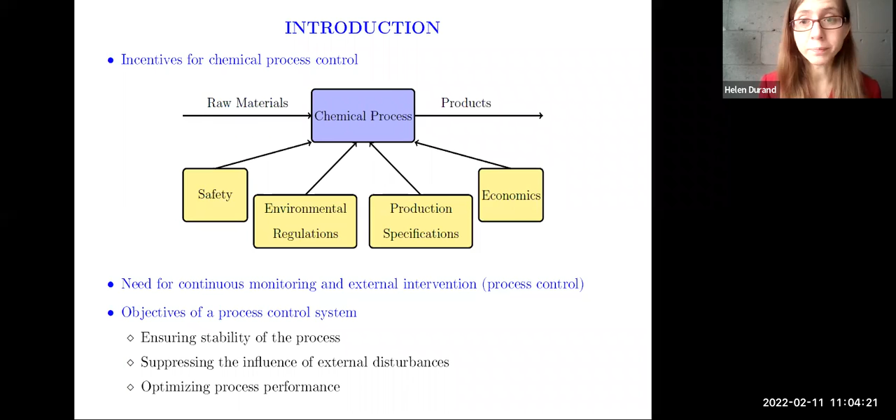We have to continuously monitor how our process is doing with respect to our objectives, and we have to do some external intervention if it's not meeting some of these. Process control gives us an automated method for that external intervention. In chemical engineering, it's very common for our process control systems to be part of feedback loops, shown here.

The basic idea of a feedback control loop is that we have an output from our process, which for chemical engineers is something like temperature, pressure, or concentration in a reactor. We measure that with a sensor, and then the measurement is compared against the set point, which is the value we want our output to take. The error between the set point and the measured value is communicated to the controller.

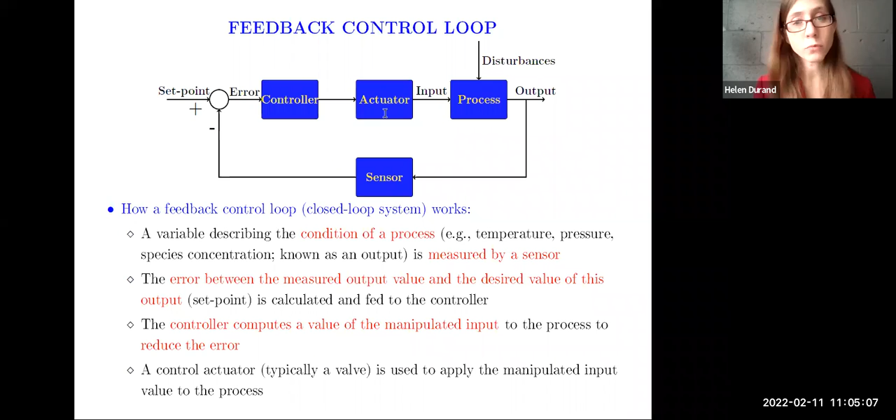The controller uses some mathematical algorithm to determine what value of input to apply to the process to try to reduce this error. Then an actuator, which for chemical processes is often a valve since we're dealing with flows of materials in pipes, will actually physically implement the input on the process.

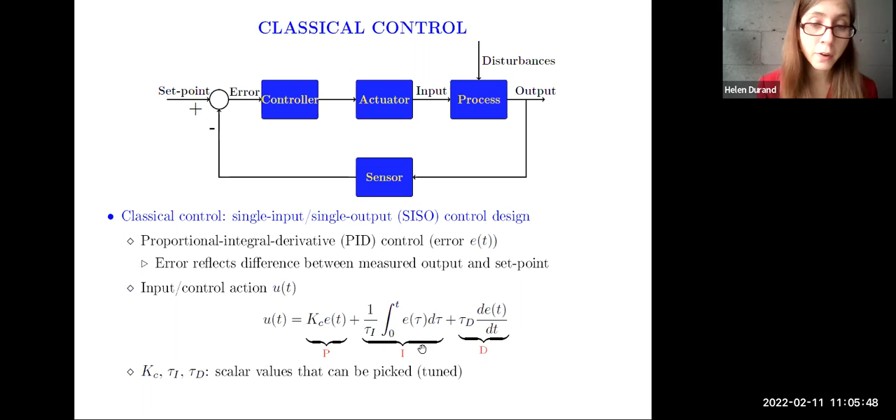The big question in control design is what mathematical algorithm the controller is running. Typically in industry, that control algorithm will be something like a proportional integral derivative, or PID, control law. It has a form where the input U for the process is equal to a function of the error e(t) between the set point and the measured value of the output. This expression includes a term proportional to the error, the integral of the error, and the time derivative of the error — hence the name PID control.

Even though this has been very successful in chemical processes and is used all over, it does have some disadvantages in some cases. For example, tuning this controller — picking the values of Kc, tau I, and tau D — typically requires a process model, and even then it can be challenging to get the best tunings. This control law is also sort of a one-size-fits-all controller; it doesn't let you adjust for different process dynamics beyond changing these tuning parameters to try to get the best response possible.

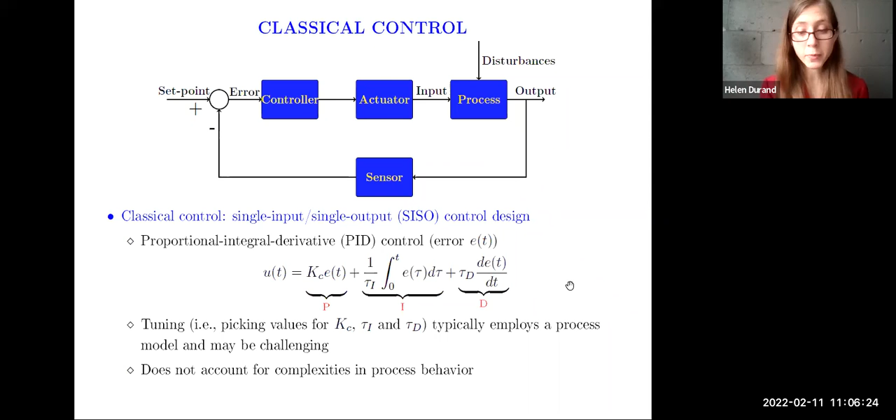So to try to move beyond this and say, okay, for some processes that's not ideal — what else could we do?

People have over the last decades been developing model-based controllers. What that means is that now the control law is not just a one-size-fits-all thing anymore. It's actually developed to be explicitly related to your specific process dynamics, supposed to help manipulate your specific dynamics at hand in a way that will give you your desired response from your process. So to do model-based control, we have to have a model.

This model comes either from first principles modeling—for chemical engineering, it would be what we call mass and energy balances, which I'll mention more about in a minute—or we identify the models from input-output process data. The model then describes our process dynamics, which is the variation of the process state variables in time due to disturbances, inputs, and interactions between variables. Controllers are then made that are based on that process model.

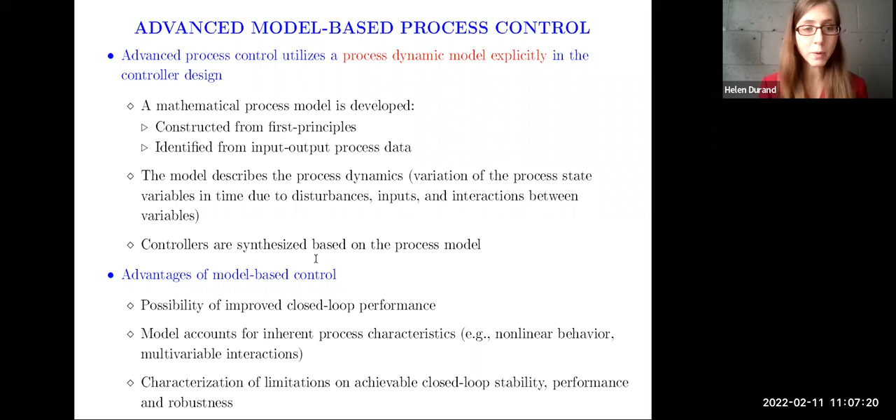In chemical engineering, a lot of times our models are nonlinear. I'm going to explain that by first describing a very typical example that we'll learn in undergrad in chemical engineering, which is called a continuous stirred tank reactor. This is one of the most basic reactor models in chemical engineering that you can have.

The idea is that you have this reactor, and there can be a heating coil with a heat rate Q being supplied to the system. There's a feed in and a feed out of this tank where reaction is occurring. The feed includes some reactant at a concentration Ca0, and there's a temperature of the inlet stream to this reactor. Then you have an outlet concentration of your reactant species A, and also a temperature.

A CSTR is considered to be perfectly mixed, has a lot of assumptions. If it's perfectly mixed, the concentration of what's leaving and the temperature of what's leaving this reactor are the same as what's inside. So that's basically what a CSTR is in our chemical engineering education.

Even this system, which has many assumptions and is very idealized, if we make a dynamic model using what are called mass and energy balances—which essentially say the mass into this has to equal the mass out plus any mass generated, and the energy in has to equal the energy out plus any energy generated—we get this system of equations showing how the temperature and the concentration of the reactant are changing in our reactor over time.

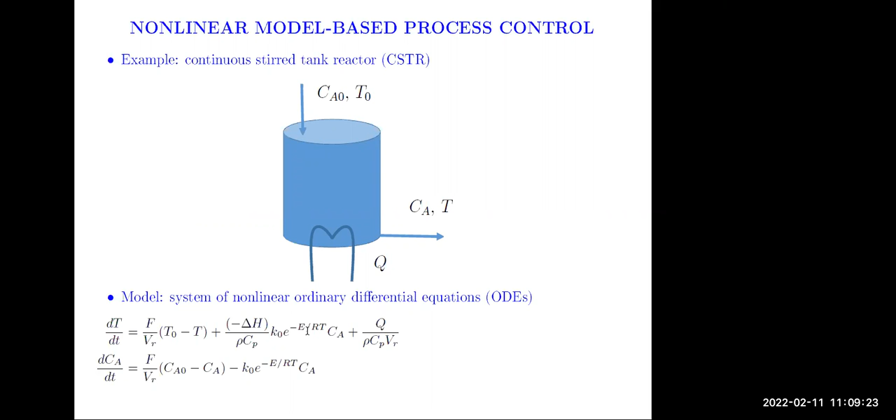But when we're designing controllers for chemical processes, we don't want it to be: okay, this controller for this process, then next process, let me redesign it from the beginning. We want to try to design general principles of controllers that can allow us to take a certain class of controllers and apply it to many different types of systems, all described by nonlinear ordinary differential equations—maybe different ones—so we have a general framework for describing their controllers.

So to do that, I'm going to introduce some notation. Here, X means the vector of the process states, which for this example would be things like temperature and concentration of the reactant in the reactor. Then we have U, which is the vector of the process inputs—something that I'm actually able to change. For example, I can change a flow rate of fluid through this heating coil, which impacts the heat rate being applied. So maybe I say the heat rate I'm adjusting, and that will be my manipulated input.

Then the disturbance here, or W, is something for the process that is changing with time, but I don't have the ability to manipulate it as I want. For example, say I'm getting feedstock from some tank, and over time the composition changes a little bit because I'm taking it from different parts of the tank, and maybe that tank wasn't fully well mixed. In that case, my concentration of reactant in the feed is changing with time, and that's like a disturbance. Now that we have that notation, this is what I'm going to be using in the remainder of this talk to signify a system of nonlinear ordinary differential equations, which can represent many process models that we use in chemical engineering.

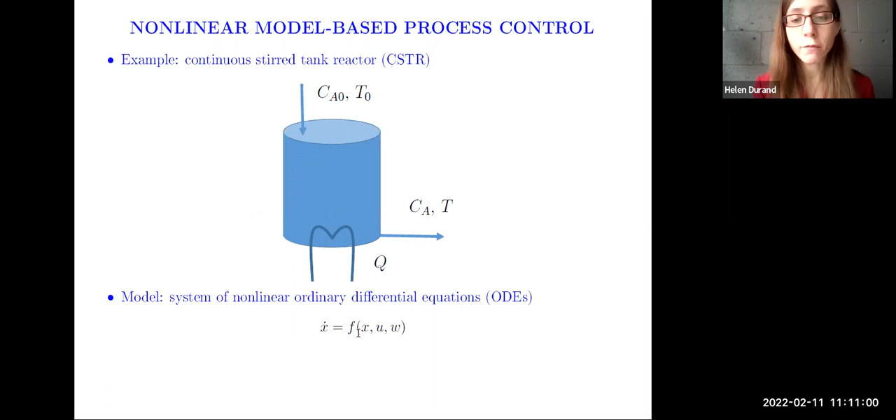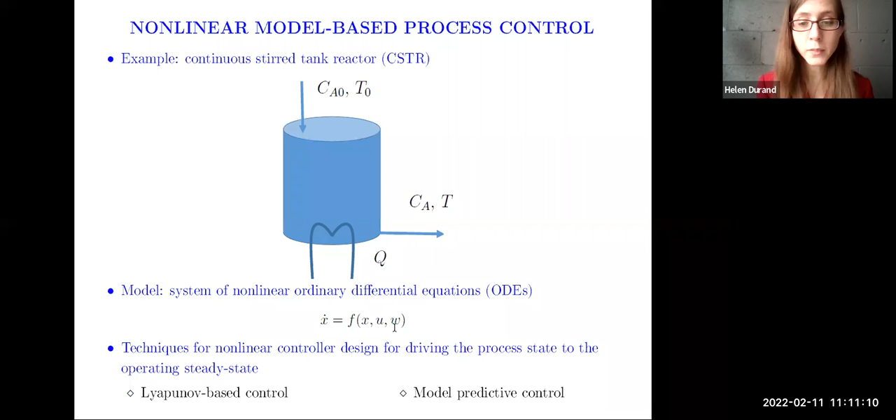So what this means is that the time derivative of the states is equal to a nonlinear vector function of our states, inputs, and disturbances. A variety of techniques have been developed for designing controllers for this class of systems, and model predictive control is the type that we work on.

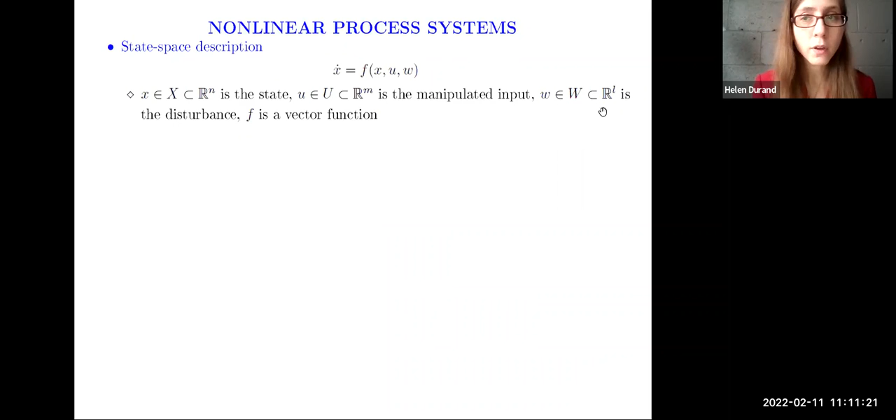I will describe model predictive control, but I have to go through a few more assumptions we're making before I do that. First, our state, our input, and our disturbance are all bounded.

Second, we assume that our process is stabilizable, in the sense that there exists some control law, an explicit function of the process state, that makes our origin or steady state asymptotically stable, meaning it will drive the state toward the steady state.

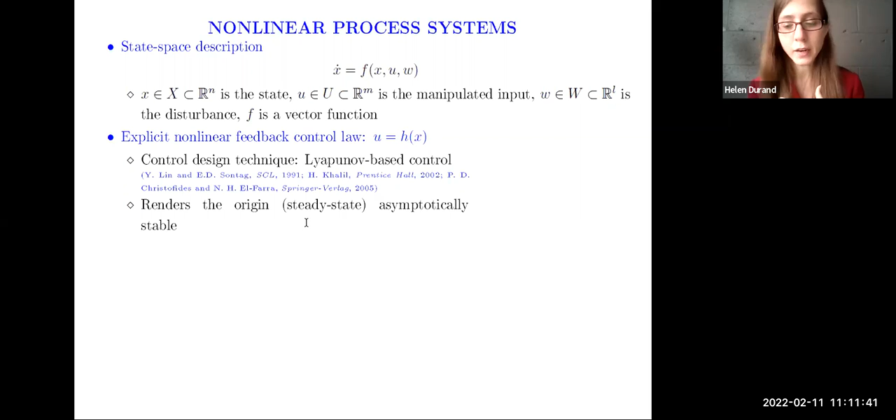In the sense that there exists a Lyapunov function V, for which the time derivative of this Lyapunov function is negative along the closed loop state trajectories under this controller h of x, for all x in the neighborhood of the origin. This is better shown in this figure.

The idea of asymptotic stability is that you approach the origin over time under your controller. If we think of this Lyapunov function like the energy of our system, it takes its zero value at our steady state or origin, and as you go progressively away from the steady state, it's increasing.

So what happens is, if I'm able to find a controller that makes this Lyapunov function decrease over time along my state trajectories, that means I must be approaching the origin under this controller, because the origin is where there is the minimum value of this Lyapunov function.

In this figure, I also denote this region omega rho in red. This is a region where the Lyapunov function is upper bounded by rho, a number. This will be important in the remainder of the talk, and I call it the stability region.

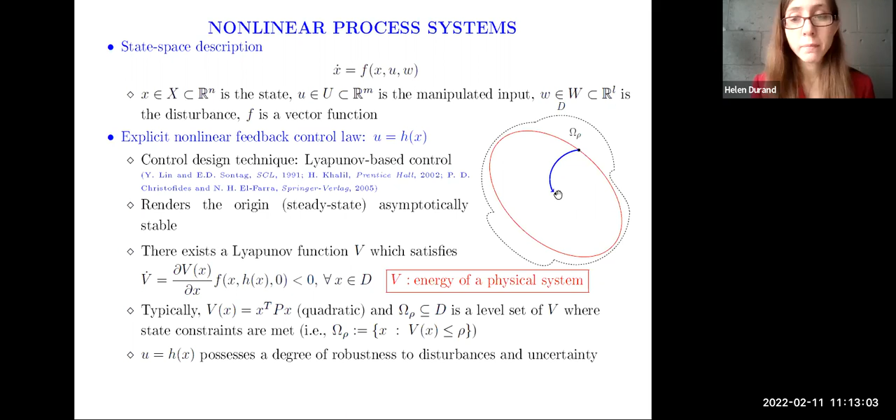Overall, our controller h of x does have a degree of robustness to disturbances and uncertainty, meaning that even when I have some plant model mismatch or disturbances and uncertainty, I'm still able to drive the process state essentially to my steady state. The drawback is that I'm not able to explicitly account for profitability using this controller, or constraints I might have for things like safety.

That's where model predictive control comes in. Model predictive control is an optimization-based control design. This means it's a controller where the control actions we're computing are actually the solution of an optimization problem.

The optimization problem typically has as its objective function, which is what we're trying to minimize, the time integral of a quadratic tracking stage cost. This would have a form like ax squared plus bu squared if you have a single state and a single input. We solve our optimization problem every delta time units.

In control, we want to continuously apply new control actions to our process to help manipulate it in the best way over time. So at every sampling time, we take a measurement of our process state, compute a new control action using this optimization problem, hold that constant for the subsequent sampling time of length delta, then resample the state, compute a new control action, and so forth.

This means that when we're computing the solution of this MPC, we compute a piecewise constant input trajectory with n pieces, where n is what we call the prediction horizon, and each piece is held constant for a period delta.

The idea is that the solution of this optimization problem is something like this dotted trajectory - a trajectory of what the input should be for my process over time, where for one time period the input is held constant, then I let it change at the next sampling time, then again at the next, and so forth, all the way to the end of the prediction horizon.

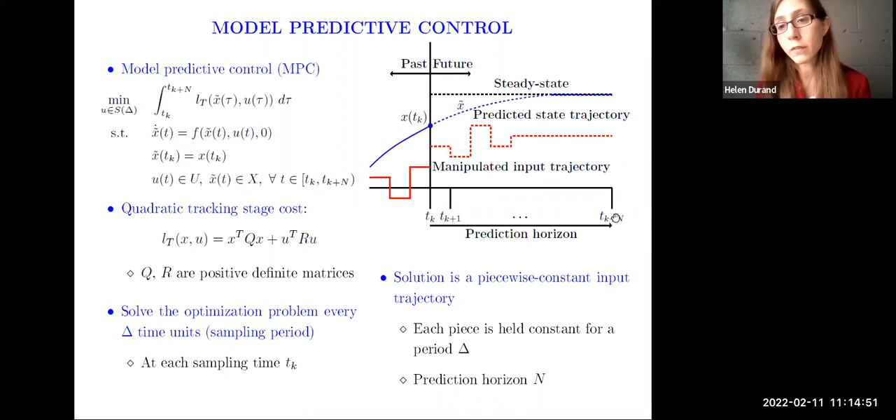When we solve this optimization problem, we're finding the values of our input that make our objective function as small as possible, given that the predictions x tilde of the state vector have to come from solving this dynamic process model, and that our input and state constraints have to be satisfied.

Typically, nonlinear programming algorithms would be used to solve an optimization problem of this type. A really important issue for MPC is the issue of feasibility of this controller - whether or not there exist any inputs that can cause all of my constraints to be met simultaneously. If not, that would be a problem, because it would mean I'm not able to meet my operating specs.

The MPC has to be designed, and the initial condition has to be chosen, such that there are control actions that can allow me to meet all of my constraints and compute a feasible control action.

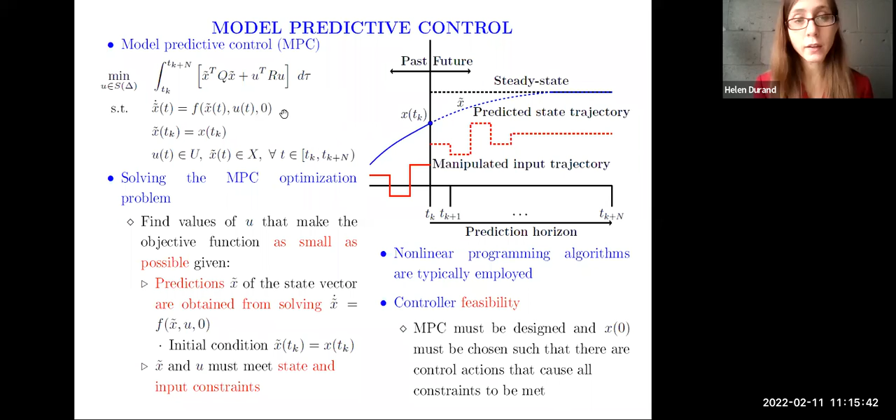So I mentioned that the solution of this optimization problem is actually a piecewise constant input trajectory that goes throughout the prediction horizon. Even though we calculate what the input should be into the future for n time periods, we actually only apply the first one to the process, because the model we're using in our MPC is not perfect. As a result of this plant-model mismatch, we want to take a measurement of our state, compute the best control action we can right now, apply it, and then discard the rest of the input trajectory we computed.

So then it might sound like, okay, why compute the entire trajectory up to n sampling times into the future if you're only going to apply the first piece? Well, the reason is very similar to when you're driving a car: you look far in front of you instead of just a foot in front of you. You don't want short-sighted behavior when choosing what's the optimal thing to do right now.

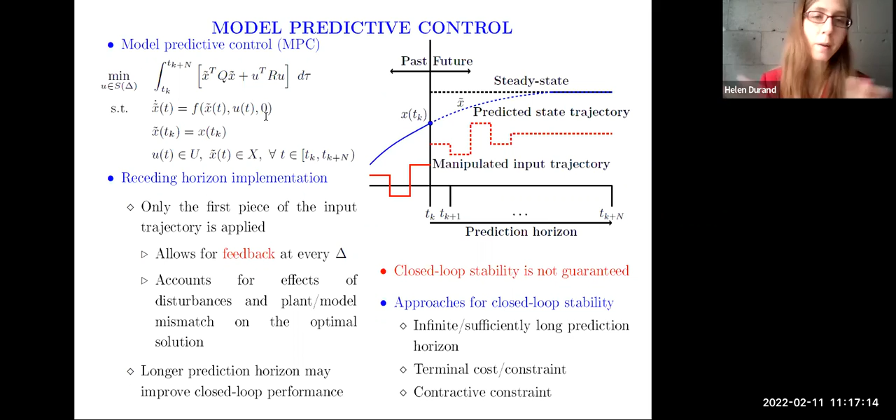So overall, the objective function of this MPC takes its smallest possible value when x tilde is 0 and u is 0, which happens at our steady state or origin. So what this means is that a well-designed MPC should be driving our closed loop state to the steady state or the origin. When it does that, that's one notion of what we call closed loop stability in control. However, even though this MPC is supposed to drive you toward the origin, without a number of different theoretical conditions or extra constraints, you actually can't guarantee that this control law is going to drive you toward the origin.

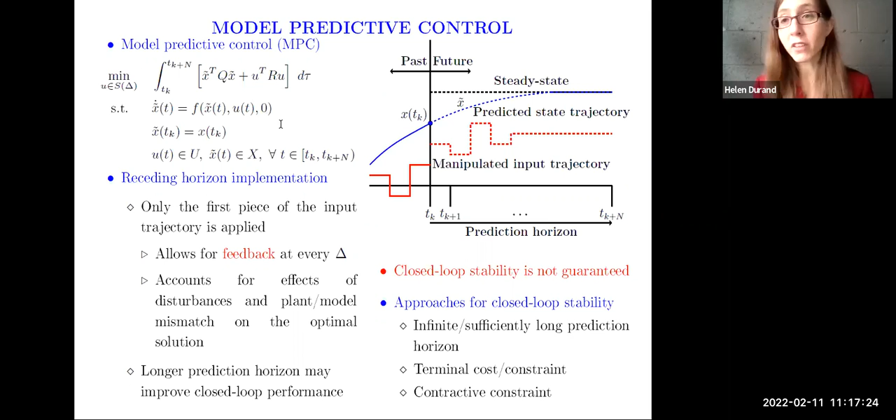But MPC has worked pretty well in practice, and we also have a lot of theories about it. So that covers what MPC is.

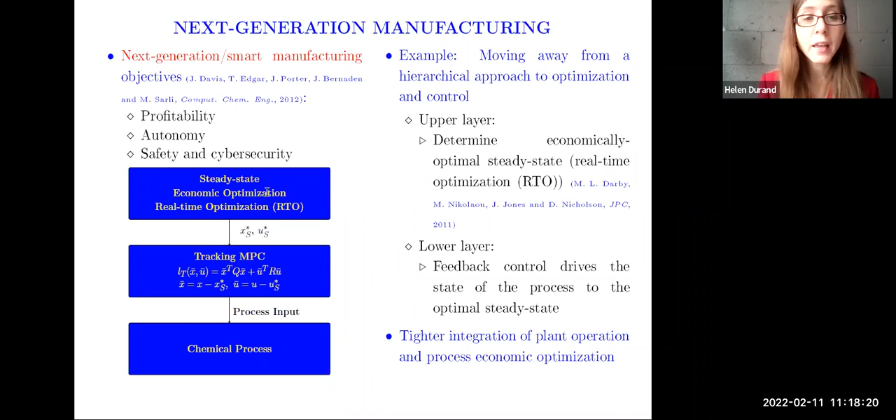Even though this is a way of integrating economic optimization and control, when we think about the goals of next generation manufacturing, like greater profitability, greater autonomy, and greater flexibility, separating economic optimization and control like this has been thought to maybe not be the best strategy. And so that led to the development, maybe around a decade ago, of economic model predictive control, or EMPC.

So what this is, is a way of trying to say, let's combine economic optimization and control into one optimization problem. Now we're going to have a model predictive controller. Instead of having this tracking stage cost that's quadratic, trying to force us to operate at the steady state, we can give it any objective function we want, including ones that represent the process economics. So now my controller is explicitly, all the time, trying to optimize my economics online.

And so what this leads to is potentially I'm not operating at steady state anymore, but that could be good in many scenarios. Say that my objective function itself, my actual representation of my economics, is actually changing with time—maybe there are changes in prices of things like my feedstocks or my utilities, like electricity. Or maybe I have time varying constraints. And so maybe I never really want to force myself to operate at any steady state—I just want to optimize my transient behavior. It's cases like that where we would expect EMPC to maybe outperform this type of steady state tracking.

But EMPC is really a generalization of MPC. So you could also say that a tracking MPC is also a form of EMPC, just with the objective function now being quadratic.

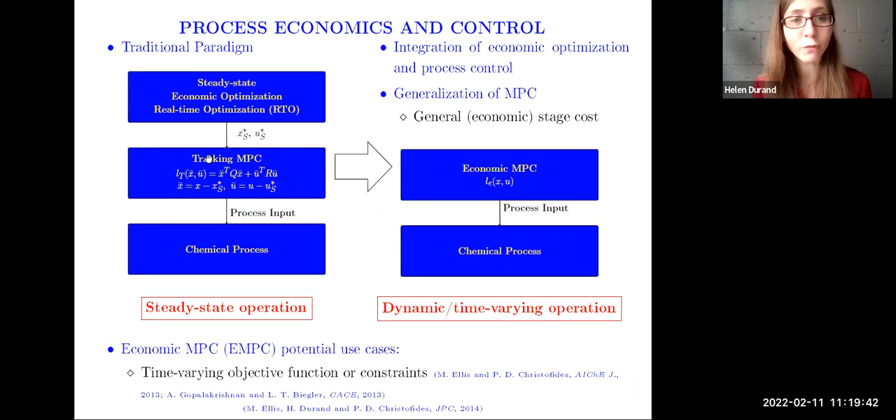EMPC, because it's really just a generalization of MPC, has the form shown here, basically the same as the MPC we already looked at: economics-based objective function, dynamic process model, feedback measurement, input and state magnitude constraints. This input rate of change constraint is not mandatory.

I added it here as a reminder that when you're trying to economically optimize your operation using a controller, you may have to add other constraints to get that controller to have behavior you like. For example, if it's optimizing economic behavior by causing very significant changes in your actuators over time, you may want to slow that down so you're not wearing out your actuators.

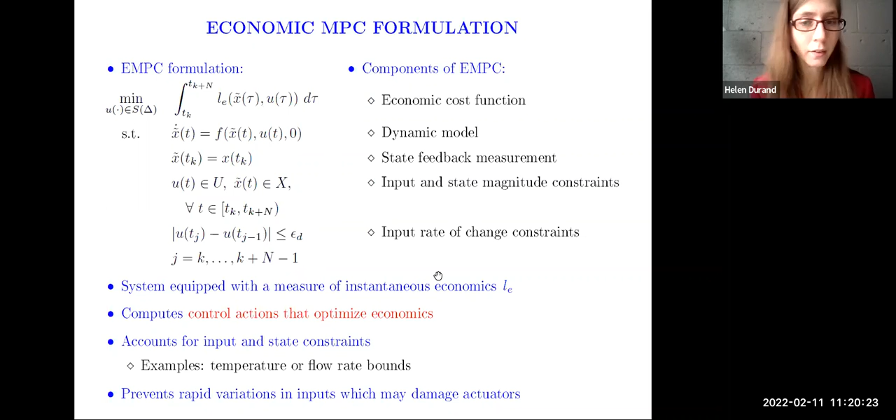Our group looks at a very special type of economic model predictive control for our cybersecurity work, because this type has really nice theoretical properties that allow us to do a lot of control theory with the cybersecurity work, helping us better understand what guarantees we can make about when things are cyber attack resilient or not. This formulation is known as Lyapunov-based economic model predictive control, or LEMPC.

This is a two-mode control design, developed in the group of Professor Christofides at UCLA. The first mode of operation requires that the predictions of the process state be maintained within this subset omega rho E of the larger stability region omega rho.

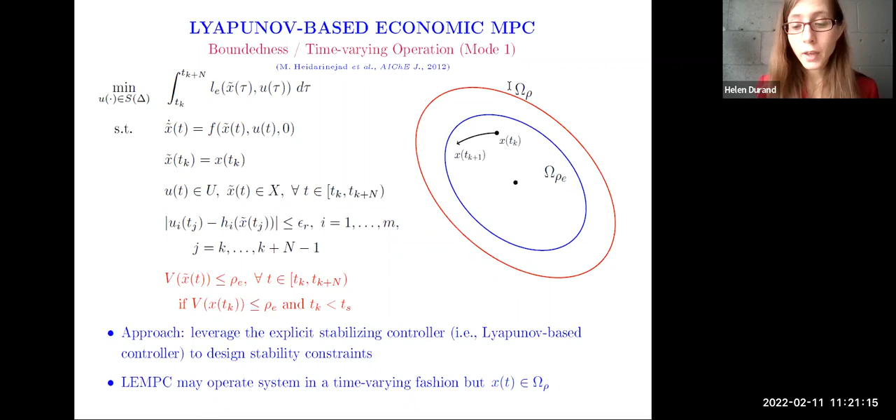The reason we do this is that it gives us a provable closed loop stability result where we can guarantee stability, in the sense of boundedness of the closed loop state within this region omega rho over time. You can think of that like a safety guarantee—for example, I guarantee that my reactor's temperature remains bounded with time. It doesn't go really, really high, causing problems like a runaway reaction.

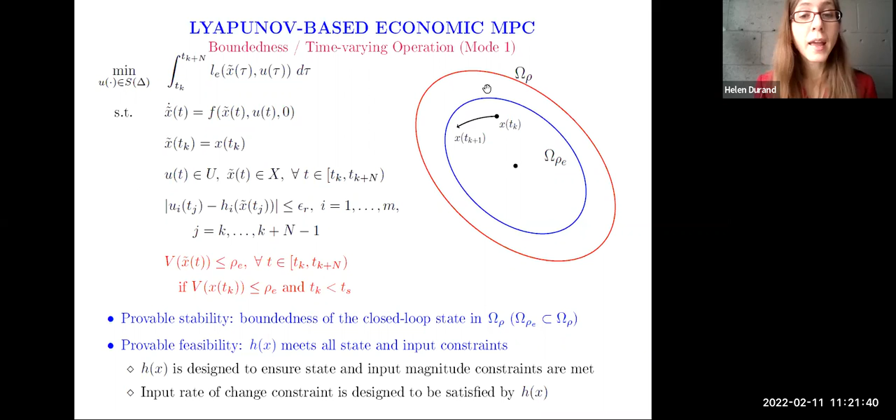We also guarantee there's always a feasible solution to this controller. We can also make some guarantees regarding the rate of change of the inputs between sampling periods. All of these results hold even in the presence of sufficiently small disturbances, due to the properties of the Lyapunov-based controller and the way the constraints are designed to respect those.

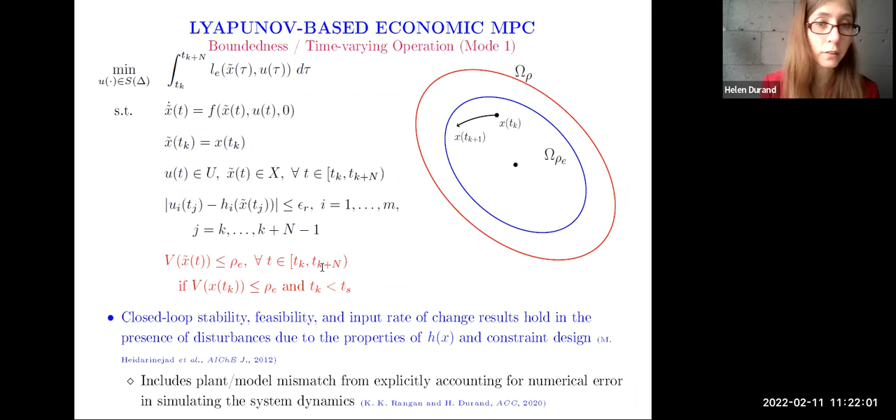The second mode of operation of LEMPC is given by this contractive constraint shown in blue, which drives the closed loop state toward the steady state over time if you keep implementing this.

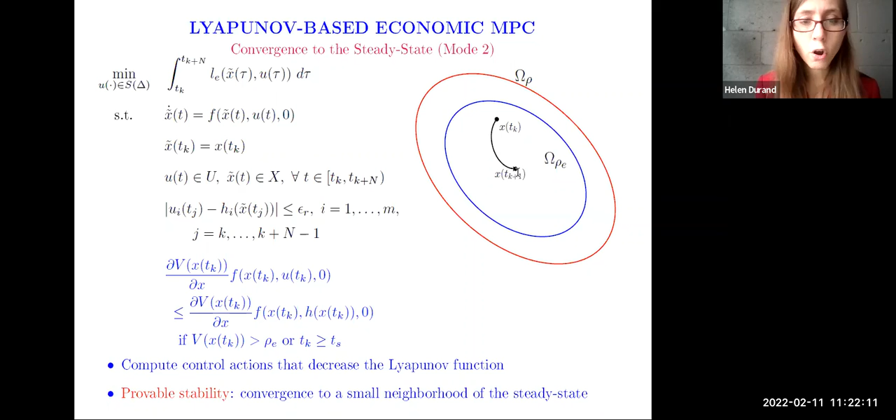So now I've covered the background on chemical process control, nonlinear model-based control, model predictive control, economic model predictive control, and Lyapunov-based economic model predictive control. I need to start talking about our work related to cybersecurity of process control systems.

As I mentioned, the motivation for this is a next generation manufacturing focus where a lot of flexibility, usage of data, and those types of things are very important. But as we try to use a lot more automation, computing systems, and data, the potential that you open yourself up to cyber attacks increases.

Cyber attacks on control systems are a particularly problematic concept because if someone has access to your control system, they can physically manipulate an actual system. For chemical engineering, that's often stuff that's very toxic, very hazardous, very problematic, potentially life-threatening to people. So cyber attacks could impact safety, but also just go after profits or production rates.

One question that should be asked is, does a cyber attacker really care about attacking a control manufacturing system? I'm going to show a few brief case studies that show yes, they do.

First, in 2009 to 2010, there was something called Stuxnet, which was a really big deal and has been in the literature about cybersecurity of control systems for a long time, because this was when it became apparent that people could use attacks on control systems to actually cause physical damage to a plant. In this case, no one was hurt, but they were able to take down centrifuges using their attacks.

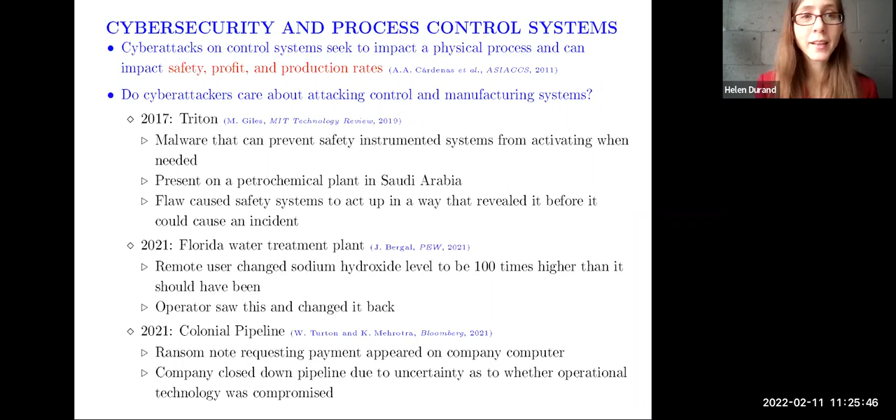In 2021, there were two big incidents. One was a Florida water treatment plant issue where a remote user went in and changed the sodium hydroxide level to be 100 times higher than it should have been, but an operator saw them remotely changing this and changed it back. The other was the Colonial Pipeline, where a company closed down a pipeline due to uncertainty as to whether operational technology was compromised, after it had become clear that someone had gotten into their system and requested money. This highlights that cyber attacks are a real issue for control systems.

Because of that, we have to start thinking about what types of attacks someone could do on a control system, and there are very many. As examples: denial of service attacks, preventing parts of your network from delivering to others; eavesdropping, where an attacker could quietly learn about the system to prepare for a more active attack later; false data injection, where they give false data to something like your sensors or actuators; time delay attacks, where they put extra delay in your measurement or control actions to try to destabilize the system; data tampering attacks, where data can be altered in storage or transmittal; and replay attacks, where correct information from prior times is sent again to make it look like everything is normal when there are really problematic things going on underneath.

The big problem is that cyber attacks on feedback controllers really destroy our whole notion of feedback control, which is that state measurements should be used to inform what inputs we apply to the process in a good way. When you somehow cut parts of the loop out in a control system, making it so the state measurements and inputs aren't related to each other anymore, this does not necessarily lead to good behavior. So our goal is to understand how and whether using control theory to look at cyber attack handling could aid in providing security with some level of flexibility for next generation manufacturing.

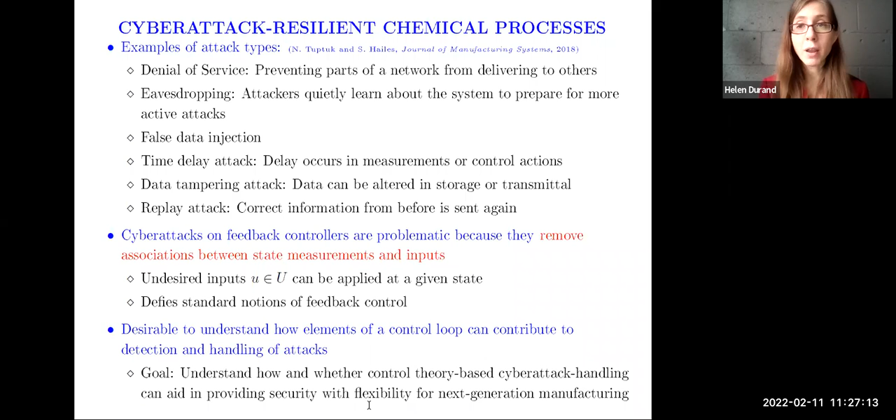There are different ways someone could try to attack a control loop. They could attack it more directly, like going straight in and recoding controllers, or putting wrong signals to the actuators instead of the ones the controller would send. Or they could do a more indirect type of attack, where they send a false measurement to the controller, which goes through the controller's processing and causes it to compute the wrong control input. Because this is complex, with many different ways people can attack processes and many different attacks they could run at once, what we've been doing is starting by looking at one type of attack occurring at a time, then building up to saying, what if multiple attacks are occurring?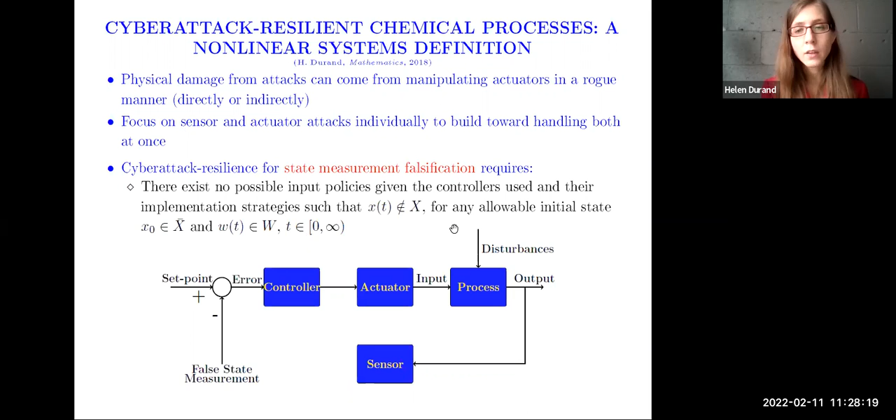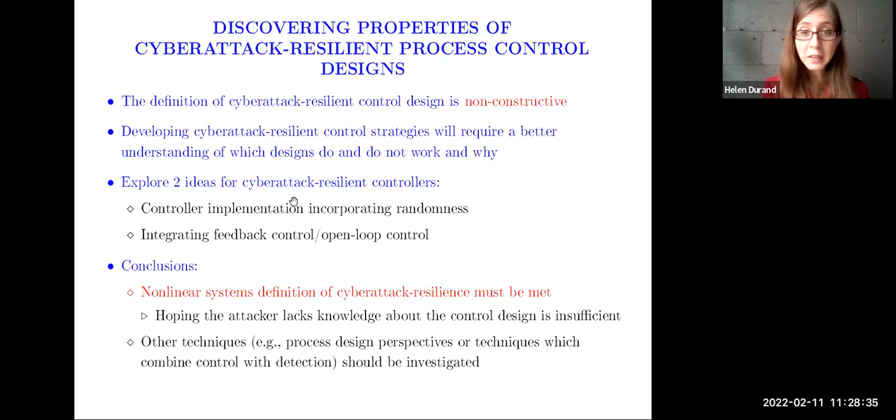I'm going to start by talking about the type of attacks we looked at first, which is attacks on the sensors. If we want our process to be resilient against any false state measurement, we'd need to say there can't be any input policies the controllers could use, with their implementation strategies, such that the state could exit a set of allowable states. But that's not really helpful for making any type of control design that achieves that. So what we did first was say, let's just try something and see what we learn. We tried something that intuitively seemed beneficial, to see whether it is: the idea was to add randomness to the control law implementation.

The specific reason we thought that might be helpful is that if we have a sensor measurement cyber attack, what the attacker is really trying to do is achieve a certain input profile from that controller by providing a state measurement that they know will go through that control law and result in a certain control action being computed. The thought process was, that's sort of like them reverse engineering this control law, because they know what this control law is, they can figure out what bad sensor measurement they need to apply to get their bad control action applied to my process.

So what if I tried to confuse that? What if I actually had multiple different control laws at any sampling time I might choose between, and then I randomly select one of them? Then maybe now it will be harder for that attacker to figure out what state measurement they should provide to get a problematic input.

Before even trying to consider something like that, we first have to ask, during normal operation, can I do that? Is this going to be destabilizing to my normal operation? We developed a strategy that was able to incorporate some level of randomness, but still maintain closed loop stability and feasibility during normal operation.

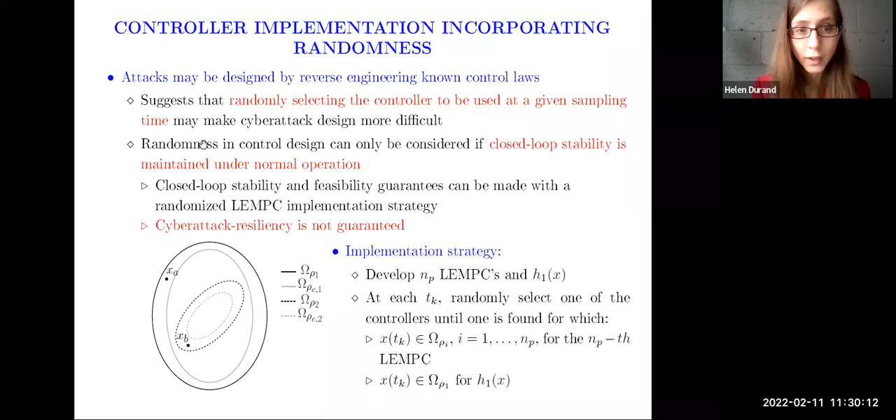The idea here was to develop a number of different LEMPCs, which I wrote here as NP of them, and also a Lyapunov-based controller. At every sampling time, randomly select one of these until we find one where our state measurement is in the stability region of that controller. This does guarantee stability and feasibility, but it does not guarantee cyber attack resiliency.

I can demonstrate this with a process example. In chemical engineering, for our control examples, we often love these CSTRs. This is that continuous stirred tank reactor I mentioned earlier, where we're having a certain type of reaction going on in the reactor. These are the dynamics of the system.

Our control objective is to regulate this process in an economically optimal time-varying fashion while maintaining closed loop stability. Our economics is going to be defined by this objective function, which we want to maximize because this is the production rate of our desired product. We're trying to maximize the production rate. We also have manipulated input constraints, which are bounds on our inputs, which are the feed rate or the feed concentration of our reactant, and then the heat rate of the reactor.

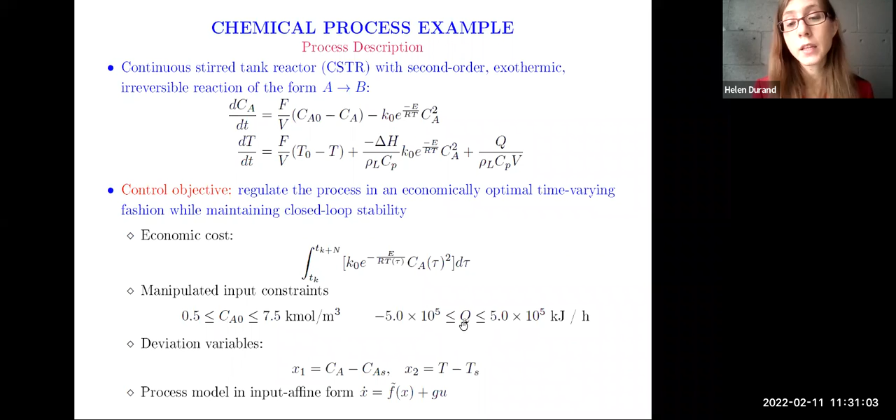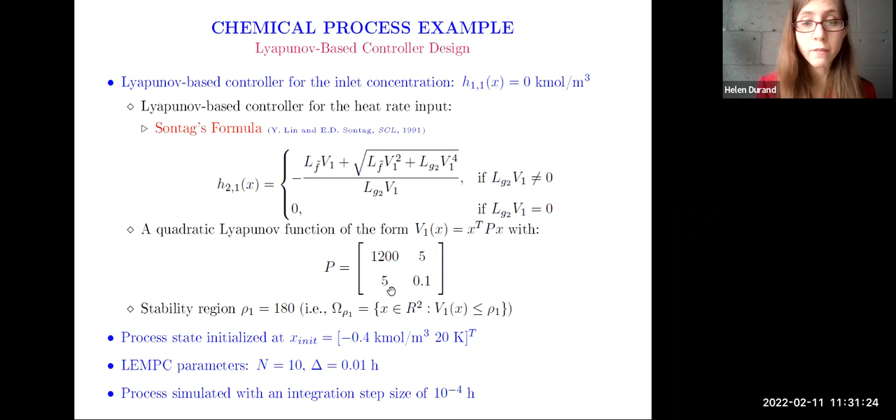We take our Lyapunov-based stability constraints, where one of them sets the input corresponding to the reactant concentration in the feed equal to a steady state value. Then we also have a case where we have a controller for the heat rate input being set via Sontag's formula, and then we have a Lyapunov function. We design our stability region. Now we're going to make 6 LEMPCs, also a Lyapunov-based controller.

So we're going to have 7 control options at every sampling time, with no attacks. In this case, we get this kind of crazy looking trajectory shown in the figure here on the right. The goal was that we never want our state to leave this largest blue region, and we can see that we achieve that. The trajectory looks a little crazy due to the random selection of the control laws at every sampling time, but it still maintains the state within the large blue region over an hour of operation.

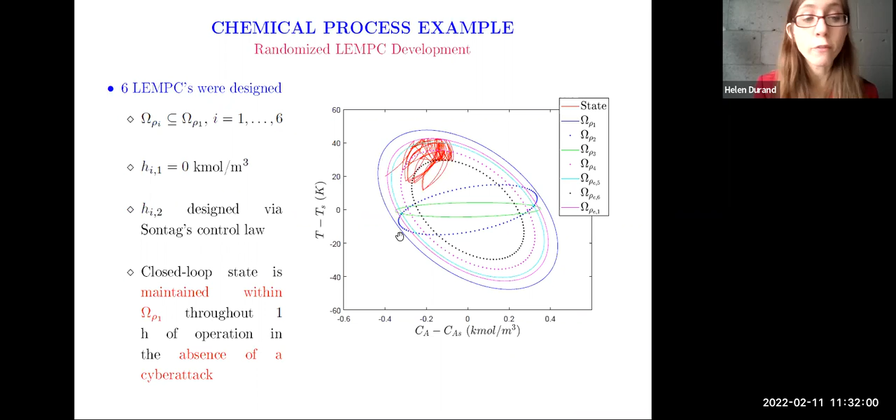So what happens when we add an attack? Let's compare the case when we have this sensor measurement cyber attack. We have a single LEMPC, and we have the randomization case. Does the randomization actually make it harder for the attacker? The answer is, not really.

Here is a bound on temperature that we set, and we say I don't want my temperature to ever go above that value. It didn't go above that value in the prior simulations when we had no attacks. But then we can watch that if we use a single LEMPC, pretty quickly, within approximately 0.01 hours, the state goes above this temperature. When we use a randomized strategy, it does depend on the seed to the random number generator, but even for cases where it waits a little longer, it doesn't wait that long—maybe after about 0.03 hours of operation, it goes above the temperature.

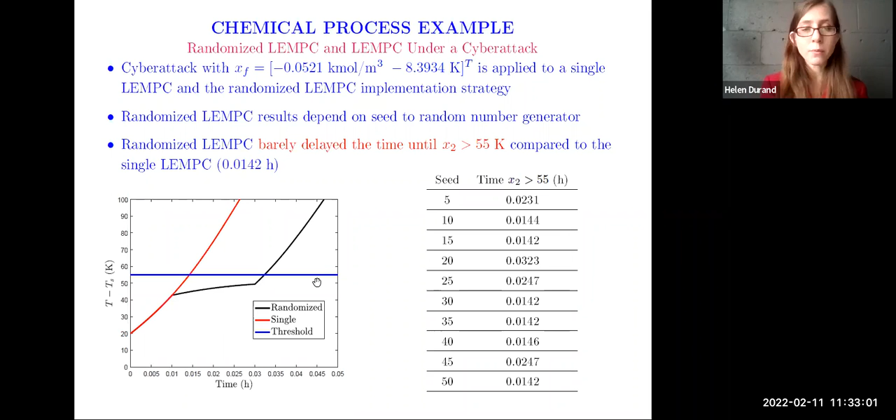So it doesn't really help that we add the randomization for this specific type of randomization policy, because what we saw is that it couldn't guarantee there were no problematic inputs that could be applied over time. So you could think of various ways of trying to modify this to do better, or maybe even trying to say, well, what if I don't want feedback at all?

That would destroy everything that we ever tried to do about control. So what's clear from this is that we need to have some new approaches.

The next thing we looked at is: what if we still have our sensors under cyber attacks, and we look at several additional strategies for controlling the process in the presence of attacks, but also add detectors? Here we design the detection policies at the same time as we design the controllers, to see if this integrated design of detection and control allows us to do any better than our prior strategy, where we just tried something that sounded intuitive.

In this case, we had an LEMPC with random modifications to try to probe for cyber attacks. This had certain conditions under which we could say an attack was occurring, but we couldn't guarantee we'd detect every attack. And if we weren't probing at the time, we couldn't guarantee we'd maintain safety. So this didn't have the best security guarantees.

We also looked at a state feedback LEMPC with an attack detection strategy based on state predictions at every sampling time. What that means is we control the process with LEMPC, but compare the state predictions versus the state measurements, checking whether they're close enough to each other.

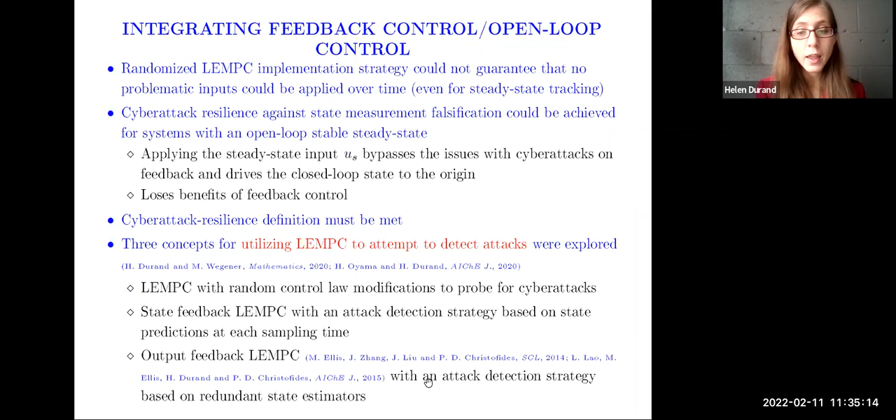Then we have this other one, the output feedback LEMPC, based on having redundant state estimators. I'll talk about this strategy more on the following slides.

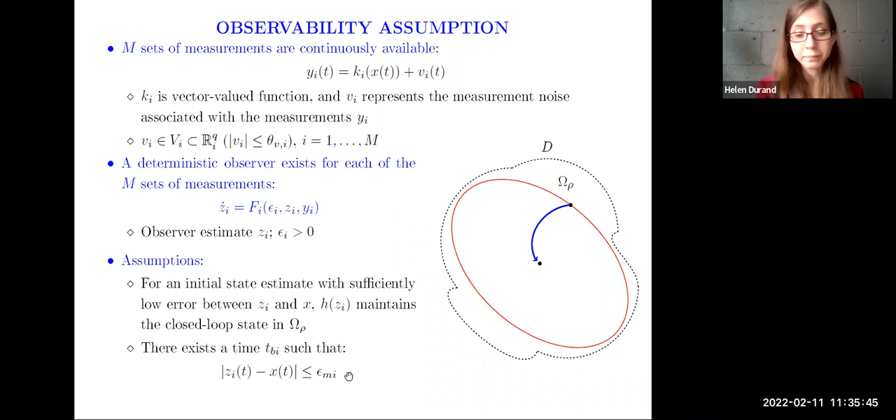This one requires that we have a number of different sets of measurements, and for each of the M sets of measurements, we develop a deterministic observer or state estimator to estimate the state of the process. We assume the estimates are within a bound, in a norm sense, of the actual state after a certain amount of time, so the estimates become pretty accurate.

With that, we modify our LEMPC design to replace the state measurements with state estimates. Just as if we had state measurements that were wrong, if we have state estimates that are wrong, we could compromise closed loop stability and our state could leave the safe operating region.

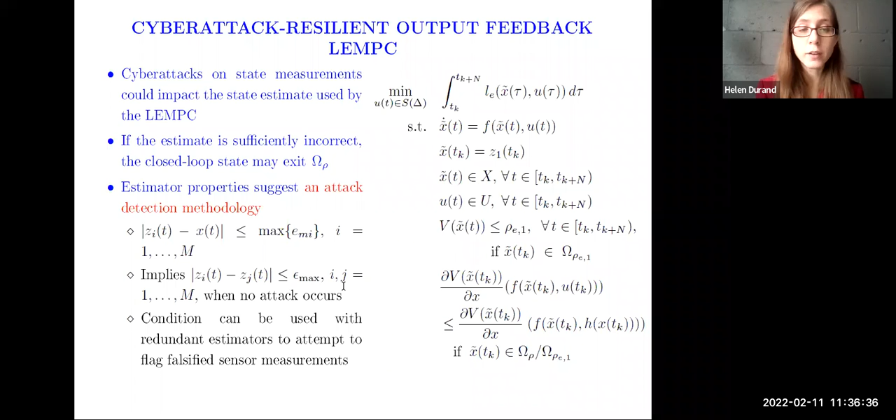So we have to see: does using estimators allow us to detect attacks in a special way? We noted that for all our different estimators, the difference between the estimate and the actual state has an upper bound after a certain amount of time. This implies there's a bound on the difference between any two estimates when we're not under an attack, and we can use this to help make a condition that detects attacks.

Specifically, if at least one of our estimates is not impacted by an attacker, then if the difference between any two estimates is greater than the bound that should hold with no attack, we say there's an attack. If it's less than the bound, we can guarantee with this controller that we'll still maintain the state within the stability region Omega rho. So we still guarantee safety even in the presence of an attack that's not detected in this case.

But the caveat is at least one of the estimates can't be impacted by an attacker, and we do have to have the ability to set up multiple estimates.

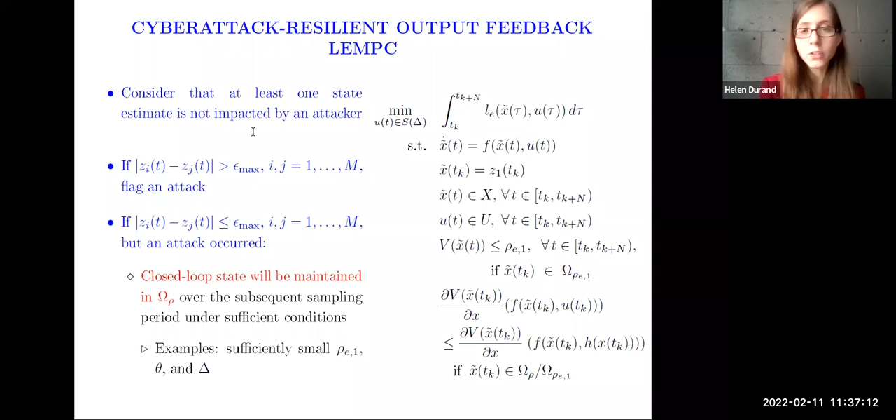Now that we've looked at several ideas for detecting sensor attacks, let's look at the difference between having sensor attacks and then adding actuator attacks on top of that—having double attacks at once.

In this case, we're again going back to our continuous stirred tank reactor, but I'll use slightly different parameters here. I didn't write them before, so you didn't know the prior values of F and V, for example, but these ones are slightly different.

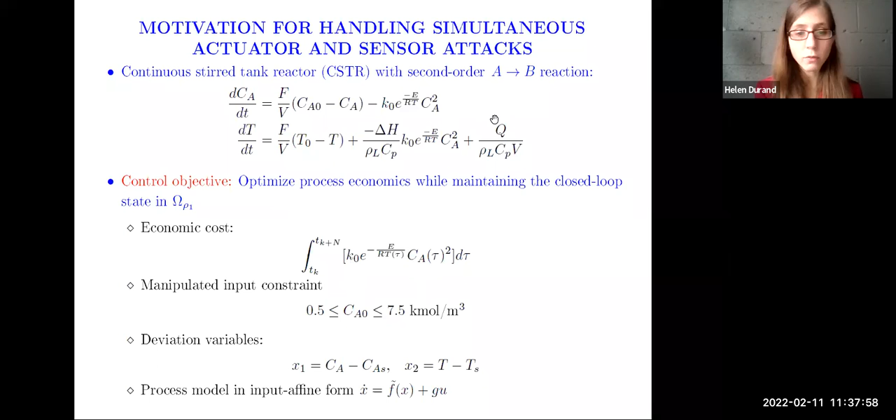We're also going to optimize our process economics, once again, with the same objective function related to the production rate of the product. We're going to narrow it down now to having only a single input to this process, the concentration of the reactant, while Q, our heat rate, is fixed. We're going to use a slightly different Lyapunov-based controller and Lyapunov function.

In order to look at what happens if you have multiple attacks happening at once, we're going to look at the case where we have a specific attack detection policy, and then we're looking at the multiple attack case.

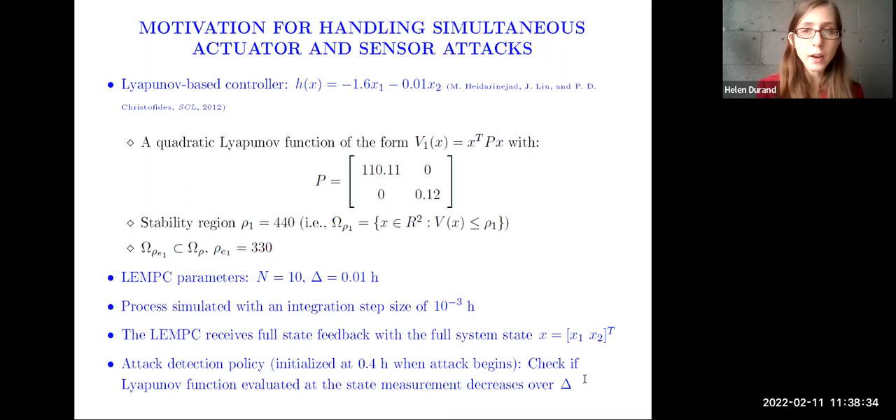Let's say our attack detection policy, initialized at 0.4 hours when an attack begins, is that if our Lyapunov function value evaluated at the state measurement decreases over time, we say everything is fine. If it's increasing, then we say it looks like an attack. So is that an okay policy for us to use right now?

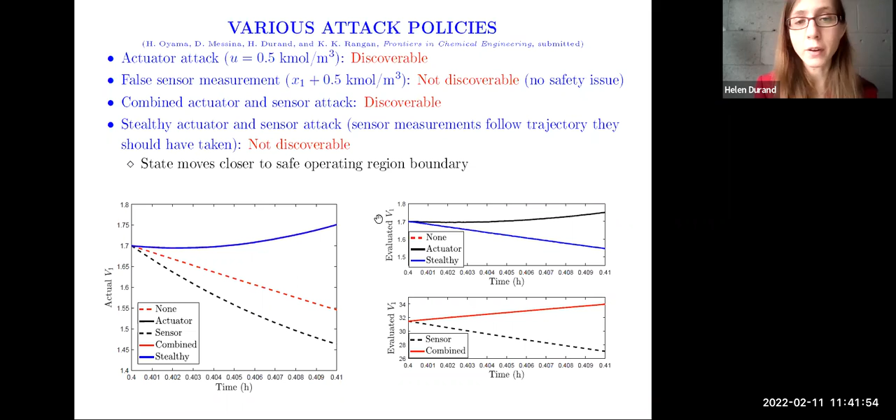So we then looked and said, okay, is there anything we can do to try to detect these simultaneous attacks? We looked at combining some of our prior detection strategies that we had used for state measurement cyber attacks only. So, for example, we can have the redundant state estimators combined with looking at whether the Lyapunov function is decreasing over a sampling period, or having the redundant state estimators and looking at whether the state predictions match our state measurements over a sampling period. When we do these things, we're able to guarantee that under sufficient conditions, we can actually prevent a safety issue before we detect the attack.

There are some caveats there though, like that we still need at least one of the estimators to not be impacted by an attack. So potentially it could be challenging to get reasonable control law parameters that fully satisfy all these resilience theories. But looking at what is a discoverable cyber attack fundamentally does help us with thinking of future ideas.

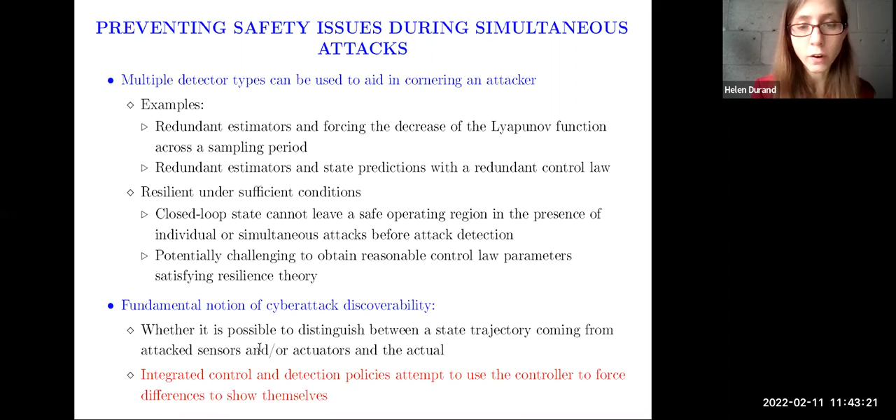Specifically, cyber attack discoverability would be whether you can actually distinguish between the state trajectory from the attacked sensors or actuators and the actual state trajectory. So what these integrated control and detection policies are attempting to do is use a controller to force those differences to show themselves. Another word for this that you'll see in the literature is active detection, or active cyber attack detection.

And so with that, I'm going to now move to something that in many ways is completely different. This is some of our more recent work where we're trying to look at implementing control on quantum computers. This really is completely different, though you could try to make some link with cybersecurity and say, in some sense, this is another case where we're applying inputs to the process that aren't necessarily expected ones. But it's really not a cyber attack at all. It's just implementing control on quantum computers.

So I'm going to begin with some background on what a quantum computer is and how it works. Information on quantum computers is stored in qubits, and qubits are the quantum computing equivalent of bits in classical digital computing. It turns out that quantum computing theory is actually done with a lot of matrices and vectors. For example, this ket 0 represents the qubit being in the 0 state, and we represent that by a vector, which is 1, 0 transpose. Ket 1 represents the qubit in the 1 state, represented by the vector 0, 1.

You can also have your qubit in a superposition state, which will have a form like C1 times 0 plus C2 times 1. If you take the magnitude squared of C1, that's the probability that when you measure the qubit, it ends up in the 0 state. Same thing with C2 - if you take its magnitude squared, that's the probability it ends up in the 1 state. Because those are the probabilities of ending up in different measured states, when you sum the two probabilities, it has to equal 1.

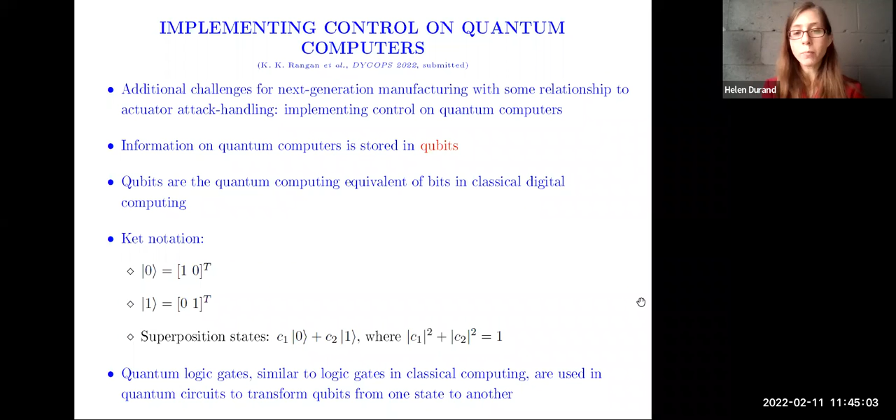In quantum computing, you use a lot of logic gates, similar to the logic gates in classical computing, to transform qubits from one state to another and set up your circuits. Here's an example of what it can look like - a lot of gates put together to form an algorithm on a quantum computer. I mentioned that in quantum computing, they usually use matrices and vectors to figure out what's going on, so you represent these different gates with matrices.

This H, for example, is what's called a Hadamard gate, and it's represented by this matrix. This gate that's represented here is actually a series of gates - it's sort of a shorthand. But these are a series of gates that all have this type of form, where this is what they call controlled phase rotation, and they have this matrix form.

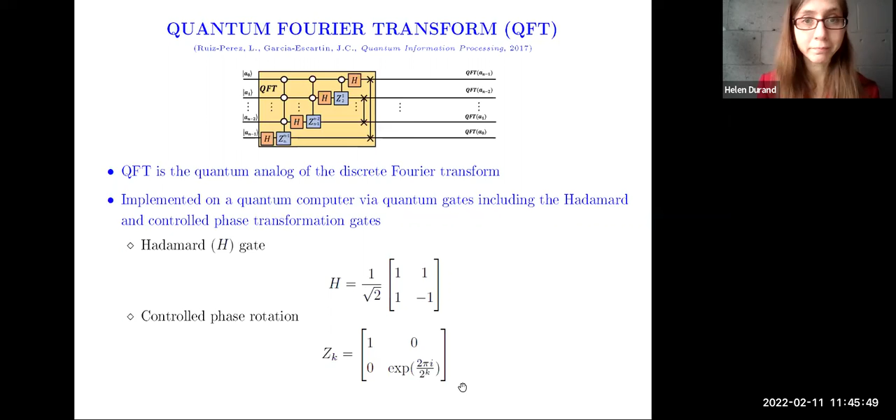The reason those types of gates we just described are important for what I'm going to be discussing is that they're part of what's known as quantum Fourier transform-based addition. This is an established algorithm, and it even has code that's available online. We made use of this code in what I'm going to be describing, with some modifications.

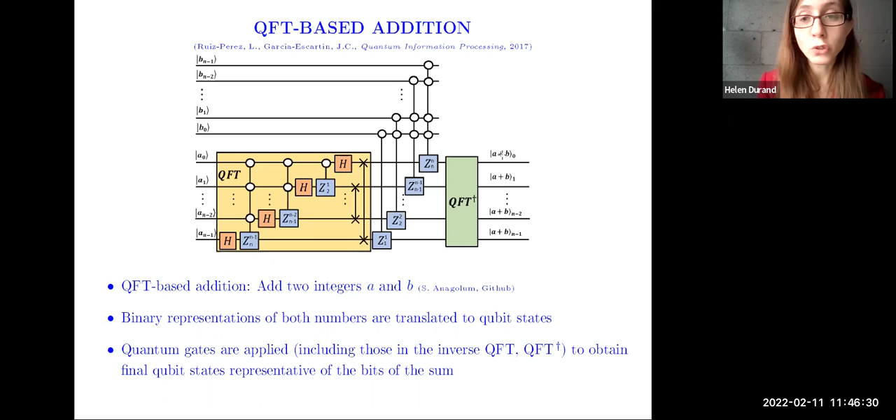This is code that adds two integers A and B. You take the integers, put them in their binary representations, do a lot of gates on the integers, and then eventually get back your qubits in a state where they show you what the sum of the original two numbers would be in binary.

Turns out the quantum Fourier transform based addition is actually deterministic. So in that case, I should have no problems calculating added values with that.

Specifically, consider that I have this process. Here is a very simple single input, single output system, x dot equals x plus u. If I use u equal to negative 2x as my control action, where I could calculate that 2x part as x plus x, that's where the addition is coming in. As long as this is a deterministic calculation, negative 2 times x, then this control law will stabilize my system. On a classical computer, I get this deterministically, no problem, stabilizing control law.

But what happens on a quantum computer? The algorithm we just looked at is also deterministic, so in theory I should be able to calculate x plus x, get it, and put that in here, and operate my process just the same as if I was using a classical computer. But today's quantum computers are not fault tolerant yet. This raises the interesting question of what happens if I try to compute control actions using a non-fault tolerant quantum computer.

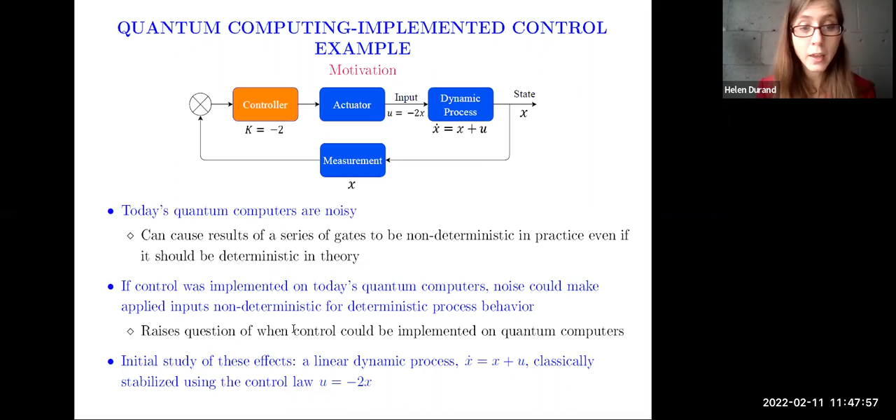That's where noise comes in. This means that if control was implemented on today's quantum computers, noise could make applied inputs essentially non-deterministic, for deterministic process behavior. This raises the question of what happens when you try to put a controller on a quantum computer. Because we want to look at the specific case that involves noise, we have to make a noise model, so let me describe that first.

IBM does have available quantum computers and quantum simulators for the general public. There are also ones you can pay for, but we don't have access to those. For the ones available to everybody, anyone can make their own account and log in right now to run quantum computers. The quantum computers are 1 qubit and 5 qubit, and this is too small for us to run our control calculations in any meaningful way.

So we can then use the simulators they have, which are simulations of a quantum computer on a classical computer. We can use these simulators to try to see what if we had a larger system, then we can look at having more qubits that are simulated. The problem is that when we use the simulated version of the quantum computer, it doesn't inherently have noise anymore, because the noise in quantum computers is a result of the hardware, not from the actual algorithms you're implementing on it.

As a result, when we implement quantum Fourier transform based addition using a quantum simulator, it's just going to give the deterministic result unless we add noise to it. To add noise, there are different ways. You can use a command available in the quantum simulator called 'get noise from backend,' which pulls the noise model off of an existing quantum computer, like the 5 qubit one. Or you can set different custom noise models, like a depolarizing error noise model.

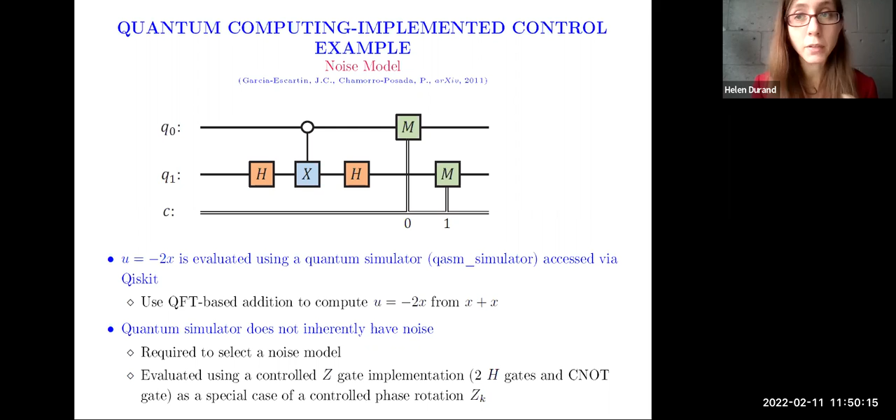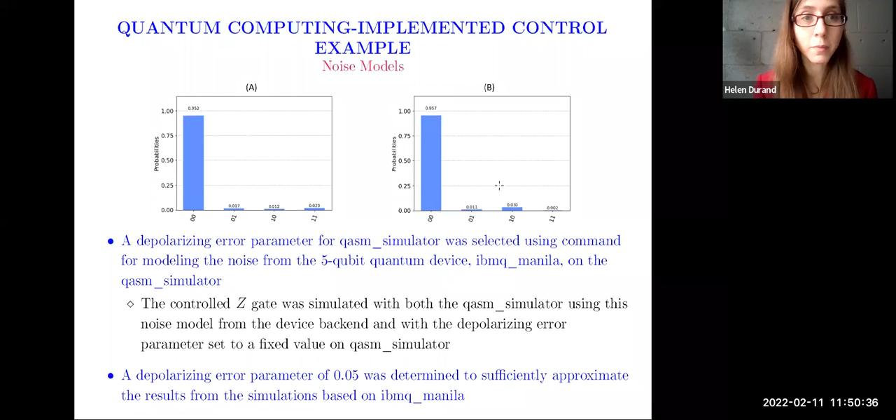And so with that, now we can actually run our simulations on our quantum computer or our quantum simulator with noise. So we're going to start our state at 7.4, and we're going to run the quantum simulators with what are called shots. Because there's potential for non-determinism and noise in a quantum computer, IBM has it set up so that you can say how many shots you want to run, which is the number of times you run the exact same thing again and again. And then we're going to run our example using the way you would do it on a classical computer.

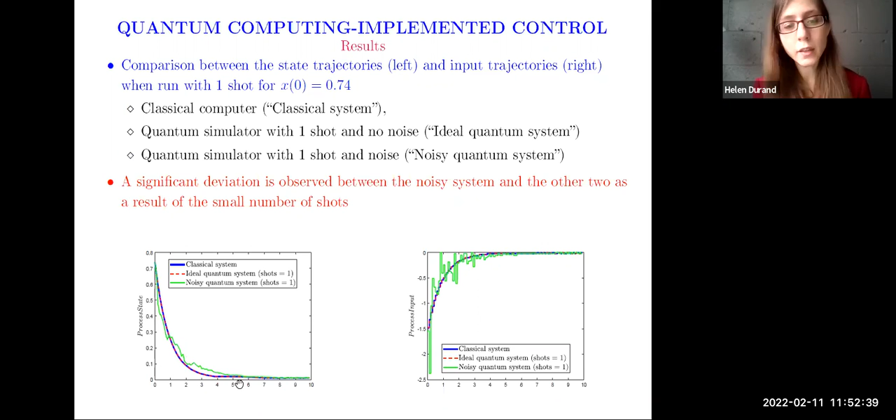And so then here we have one shot, and we can see that close to the steady state, it's not doing too bad. And then if we put 254 shots and start at this initial condition, we're actually able to overlay all the results.

And so in conclusion, next generation manufacturing requires flexibility and profitability, and it's facilitated by automation advances such as economic model predictive control. But flexible and profitable systems might not be secure, so attacks on control systems could undermine process safety. We've been looking at integrated detection control policies geared toward nonlinear systems, which have the potential to enable attacks of various types to be detected before they cause safety issues.

This does require a lot of control-theoretic guarantees, which may be hard to get in real life. And then also, it may require at least some sensors to be secure, or we would expect that if we handle attacks after detection, that we would need at least some actuators to be secure. So fundamental notions of cyber-attack resilience and discoverability for nonlinear systems are helping to provide us insights into potential future directions, developing secure controllers. And quantum computing provides another interesting potential direction for the future of next generation manufacturing.

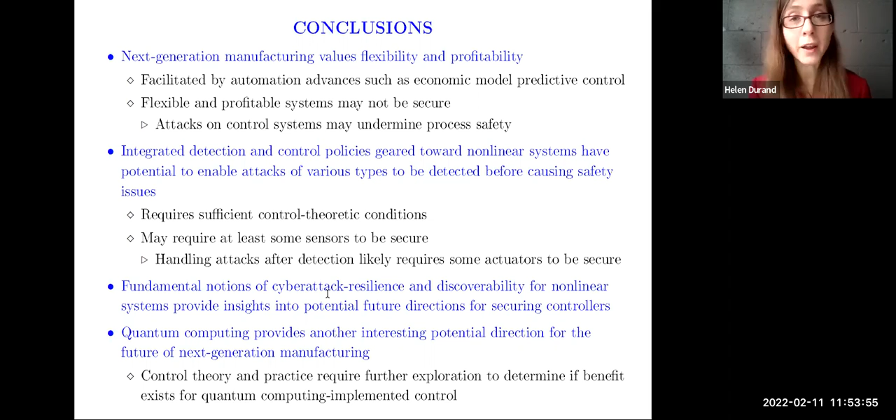We don't have any guarantees right now that it's going to be giving us any better algorithms from a speed perspective. And so more what we're hoping to do with this work is start to probe some of the theory that's related to this from a control perspective, and maybe that will inspire algorithm experts to come up with some new algorithms that we could use.